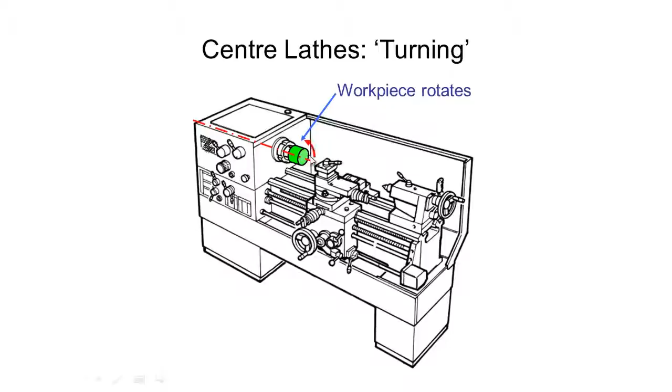This is where the workpiece that we're working on will rotate, and it can rotate at different speeds depending on how we adjust it. The bigger the piece, so the larger the radius we're dealing with, the slower we'll rotate, because at the surface of that material, a bigger material will rotate at a faster speed than a smaller one.

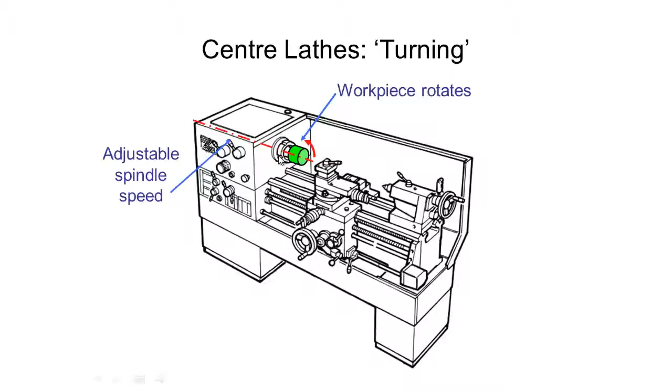Here is where we attach our sharp tools for what we're cutting and how we're cutting. It's attached to this carriage, which can slide up and down here depending on where the workpiece is and what sort of feature we're trying to add. It can also slide in and out at right angles, depending on what we're trying to achieve with our lathe, and we can also tilt it at angles to get other certain features, maybe chamfers and that sort of thing.

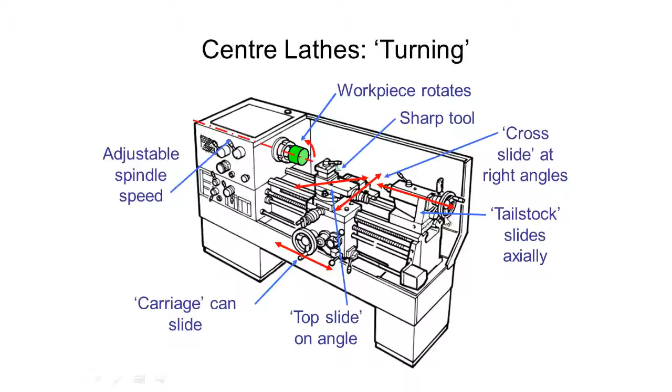At the end here we have a tailstock. This slides in and out axially using these handles here, and generally that is in line with the center of our spindle. If need be though, it can be moved off center, however that's generally uncommon.

Down here we also have a lead screw geared to our spindle, and we can set this so that our carriage moves along at a particular rate compared to our spindle speed, so we can control what sort of cut is being made gradually along our workpiece.

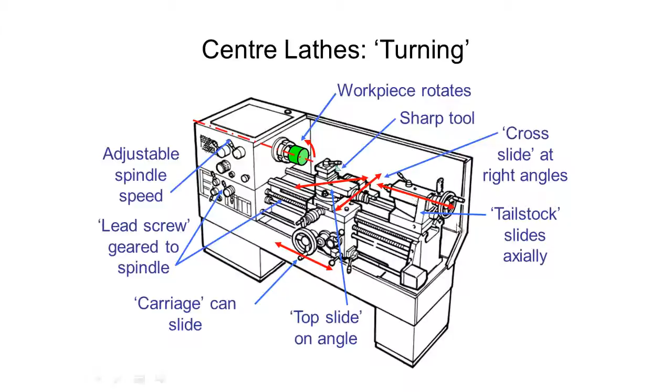Okay, so now let's take a look at some of the turning operations. We've got a long workpiece here with a few different operations going on, and we've got it being held at this side here, which would have been our tailstock in the last slide.

Just a note, we generally use that tailstock if we're dealing with long, slender, not so rigid pieces, to keep them rigid and straight.

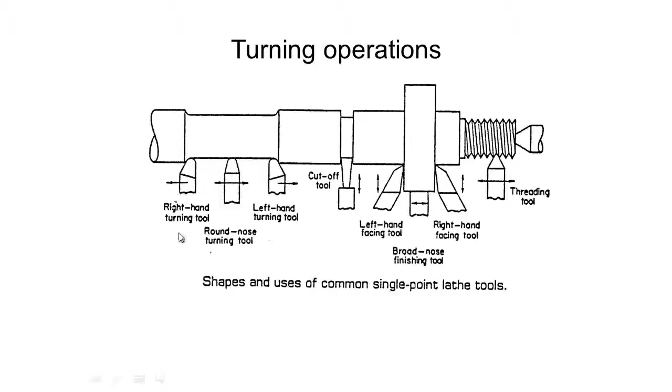So the first thing we're going to look at here is the right hand turning tool, and we've got an image here. As you can see, it's rotating on our spindle on the left hand side here. It's not being held at the end for this operation, and it looks like we've got a roughly square tool, but it's only just touching at this left hand edge, and that's moving along here to make this machine surface with this slight little round in the corner there.

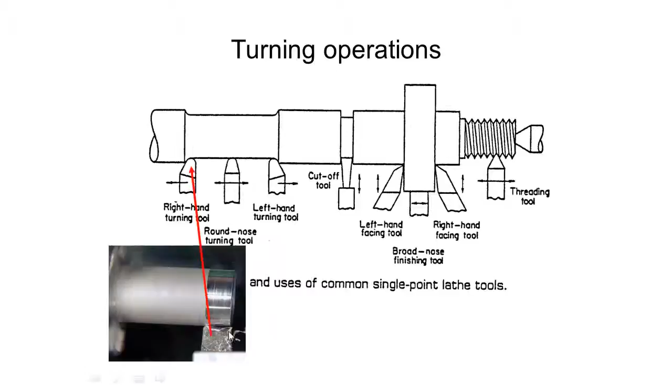Generally we're taking off just fractions of a millimeter at a time, or with bigger lathes we can take off up to a couple of millimeters. So to get the desired sizing here, we have to make several passes. That's this tool here corresponds with this tool here.

Okay, so the one thing we don't have an image for here is our cutoff tool, but essentially this works by pushing this through the material far enough till it reaches the center point of our spindle, and then it obviously just cuts it off. So this is useful if we're working on long pieces of material where we need to cut it down into several different sections.

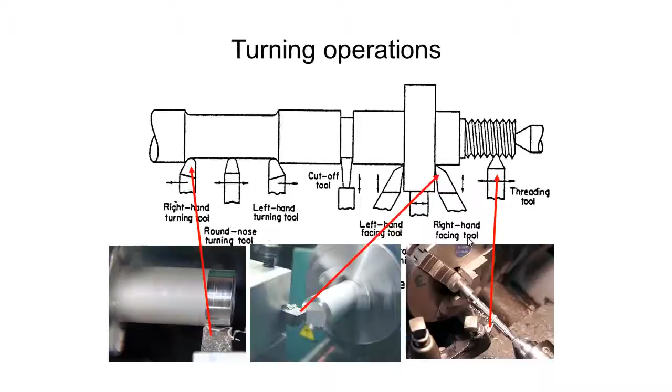And here we've just got an image of the production of a spherical sort of handle, and as you can see, this is made up of several shapes of revolution. To make this, especially by hand, would be quite difficult, and these days you'd generally use computer controlled movement to get these shapes, or you might be using a copy to mimic how to move along using the lathe there.

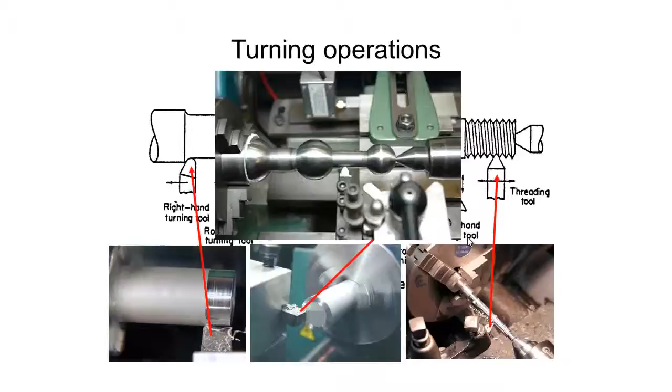So now we're just going to take a look at some more turning operations. The first one here is tapered turning. So we have our tool here and it moves along with our carriage angled. We can now move along and create a gradually tapered surface, and our representation for that is that.

Similar to just our normal turning operation, however we've just added an angle on the carriage.

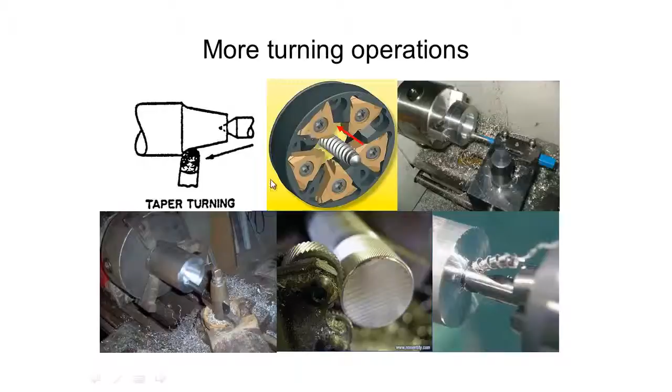The next one is form turning, where we can use a specific sort of die, something like this, which locks down onto our piece and gradually moves along in that direction. This would be another way of creating a thread in this case. So we have form turning.

The next one is boring. We have our cutting tool located here, and we can gradually move that in and out to adjust the size of the diameter of this bored hole, and of course we can move it up and down to control the depth of the bored hole. Next one is tapered boring.

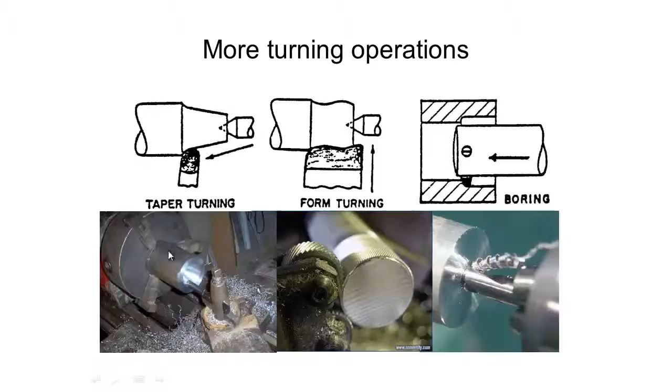Similar to boring and tapered turning, on our carriage we just angle the boring cutting tool and cut into our material like so. This one here, while not necessarily a cutting operation, we have two helical pieces here which, when pushed onto these surfaces, create a knurling pattern.

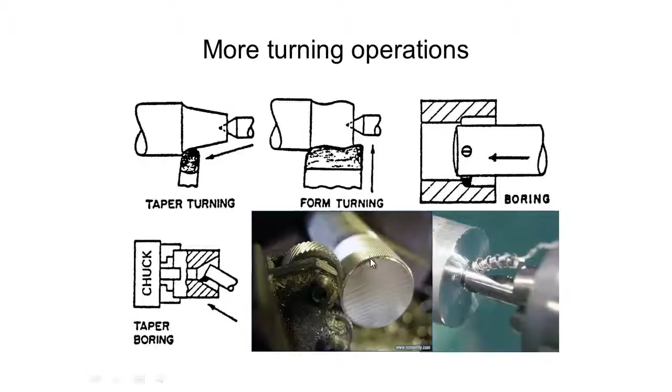These two pieces of metal are obviously very hard steel, and we have a softer steel here, and it's able to then just mold and press that steel into a particular shape that holds, and that's called knurling, and that's the look we get for it in our drawing representation. That's something that can be used to add grips on handles and that sort of thing, which I'm sure you've seen before.

This last one over here is drilling. So, opposite to our conventional drilling method where we have the drill bit spinning, we now have the workpiece turning. However, it produces the same effect, having this drill bit locked here, turning and moving that drill bit further into our workpiece.

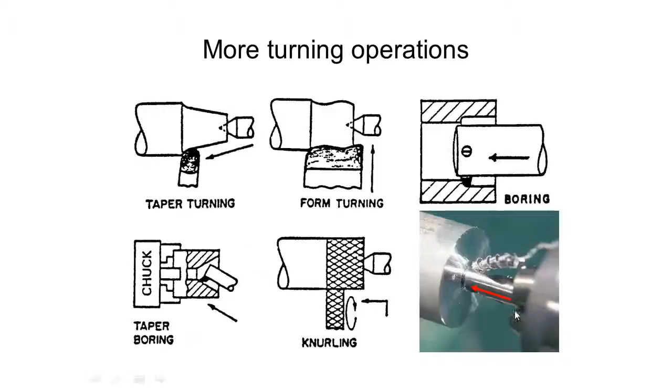Similar to drilling, we have internal thread forming, sometimes referred to as tapping a thread. We can lock our workpiece in over here, hold our tap over here, and then that gradually cuts into the material, producing a threaded internal surface.

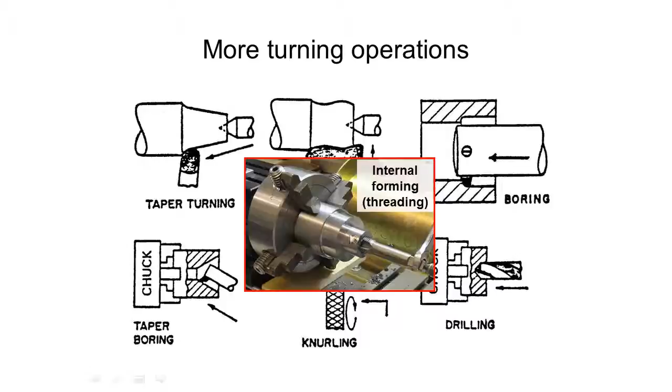The last thing I want to do here about lathes is just about how we go about holding what we're working with in a lathe. So the first thing we're looking at is a 3-jaw self-centering chuck.

This is very similar to what you find, say, on just a normal power drill. So you've got 3 little jaws, and as you tighten it up, they move together. So on a round object, they will center on that, and it will end up locking in place.

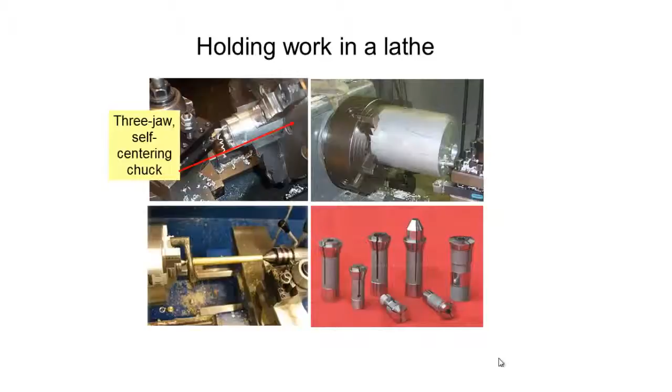These are generally good for doing any sort of circular work where you need to rotate roughly about center. Probably won't get you precisely on center. And another downside of this particular method is that once you've removed your work from your lathe, you generally won't be able to get it back on that exact same center again. We'll have to look into one of the other holding methods if we need to keep taking our work in and out of the lathe. So, generally used for round sections and hexagonal sections.

Next one we've got is a 4-jaw independent chuck, similar to the 3-jaw except we've got 4 jaws obviously. This is generally used because we can control the position of each jaw for doing some off-center boring, or eccentric boring, and can also be used for, say, milling on square sections or some other odd cast sections.

Here we're holding it between 2 centers, so we would drill small little points on the end of our section and it would be pinned between those sections. This is a method we'd use if we had to keep taking a piece in and out of a lathe to check sizes and check our work as we go.

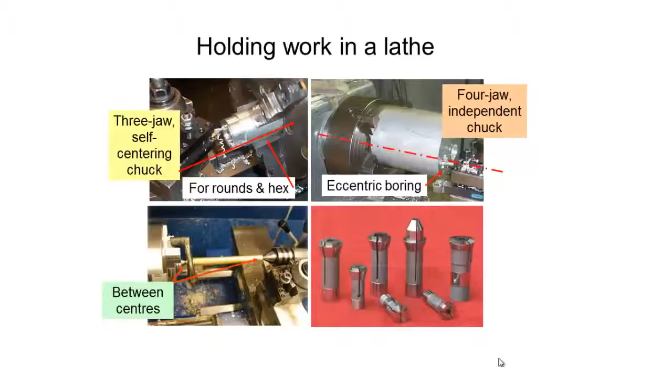At one end there's a clamp held on one of the rotating sections to make the whole workpiece rotate. And with those drill points that you have to put on the end of your work sections, using general drill bits, they leave a 60-degree angle marking in our workpiece.

Lastly, we have collets, and they're used for some standard cross sections. How these work is we insert our workpiece into the section, and then as it gets clamped on there, it pulls it down and the top squeezes our section, distributing the load evenly around the section, centering the piece we're working on.

These can generally have some good uses on particular things where maybe a 3-jaw chuck might not be appropriate. For instance, we might be dealing with quite a delicate soft material where inserting it into the 3-jaw chuck, the jaws might leave some marks on our material. So a collet can help avoid that.

Similarly, if we're working with a threaded section, the chuck may damage that thread. However, you could use a collet and it wouldn't damage that thread. So that concludes everything for lathes. In the next video, we're going to take a short look at drilling.